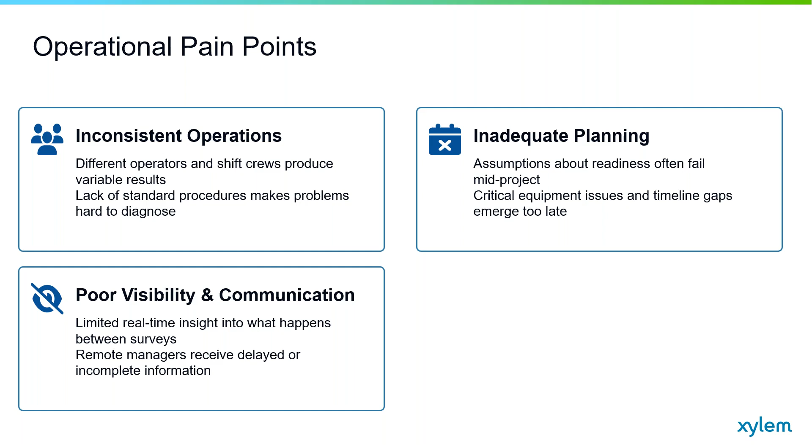Sometimes critical events between surveys go unrecorded. Let's say you have a cutter head that clogs twice during the day. If that information is not logged properly, it's not possible to know that the whole operation is getting less progress than expected.

So the data is also not always used to help new operators. When the data is not recorded, it cannot be used for training operators or understanding good practices or the good approach, so the opportunities for improvement are missed. An operational issue is not analyzed properly, so it cannot be used as a learning lesson.

In certain cases, the knowledge stays siloed. Probably there is a good operator, but he's the only one that understands how the maneuver can be executed, and that information is not transferred properly. In the same way, companies have issues having their retrospectives, trying to understand what was executed properly and what needs to be adjusted.

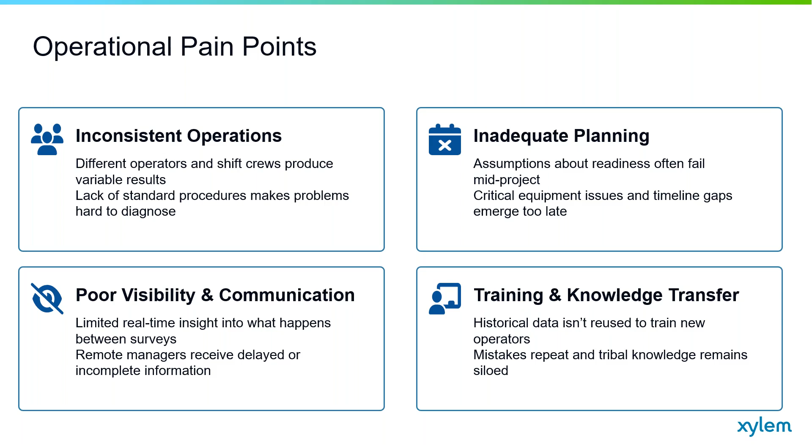On the other hand, we have the data management pain points. It is hard to have a centralized point for receiving information. In several cases, underperformance is often discovered too late. A dredge may remove far less material than planned, but management only finds out weeks later when the reports are finalized. Understanding the workloads and how the equipment is used is something that sometimes is not collected properly.

So in a sense, the issues aren't caught in time. Just for example, if you have a booster pump that is not working properly, that information can go unnoticed for days or weeks, and that affects the whole operation. So centralizing data is crucial.

As it is right now, the industry has several manual tools. Important records are sometimes lost. For example, a supervisor might log a pump downtime on paper, and if the sheet is misplaced, that downtime never appears in the analysis, leaving gaps in the data.

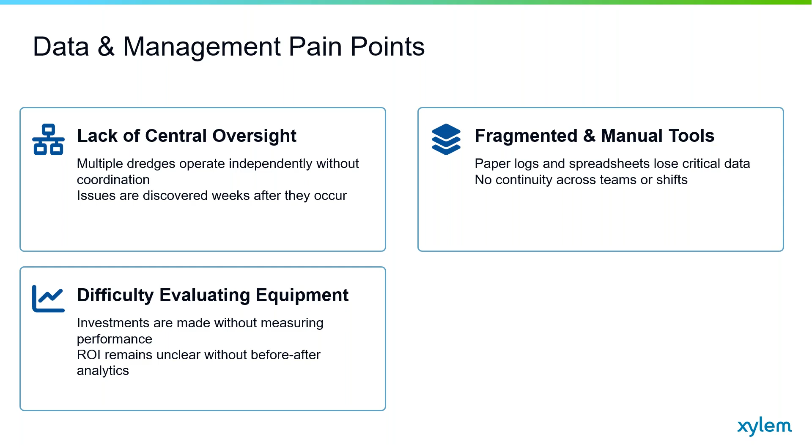In the same way, what companies want is the proper return on investment when these solutions are implemented. And finally, when the whole operation is optimized, that translates into better planning, which again translates into more efficiency in using resources. So these are the main pain points, though there are more.

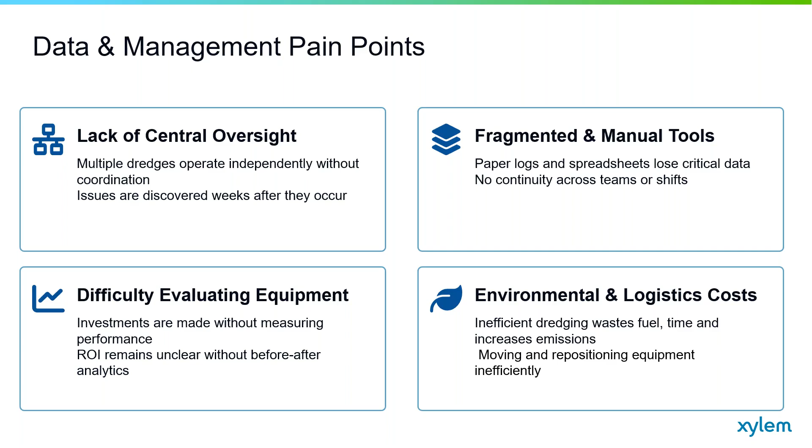We just wanted to bring some of them so you can connect the pain points to the solution we are offering. So I have the demo. I'm going to show some of the tools that we are bringing with DREDGEPACK. Just to start pretty quick, I'm going to jump into the hardware configuration to show only a couple of details that we are going to have in DREDGEPACK.

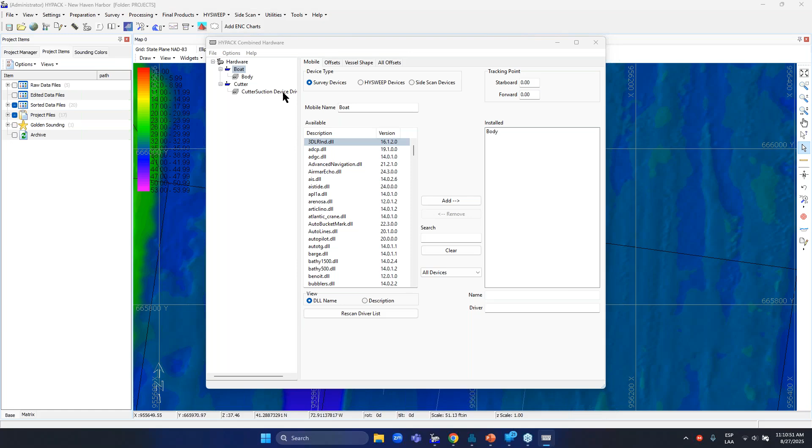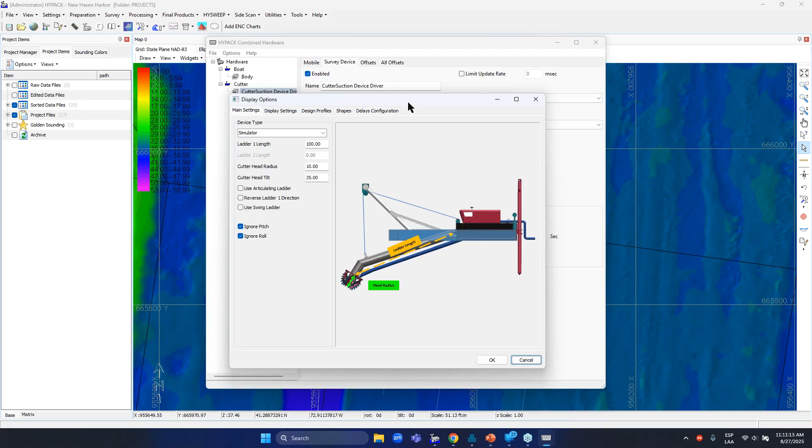The first part is we are improving the whole user experience with all the different drivers, in order to simplify the way you can configure the drivers and also bring in additional tools that can enhance the calibration. In this case, we are very focused on the reports and information that can be generated from the dredge, and that's why I'm going to cover only this tab.

We are including additional tools in the drivers that make it possible to organize a structure of the different downtime or delays that can happen during the operation. This is important because it's something the operator can have available in the driver, and also the on-site engineers can have other tools in order to classify or provide more description of what's happening during the operation.

So if the dredge is not pumping or not operating, classifying or explaining why is crucial. Here you can see only an example. This is something that can be configured at different levels, providing codes and having other possibilities.

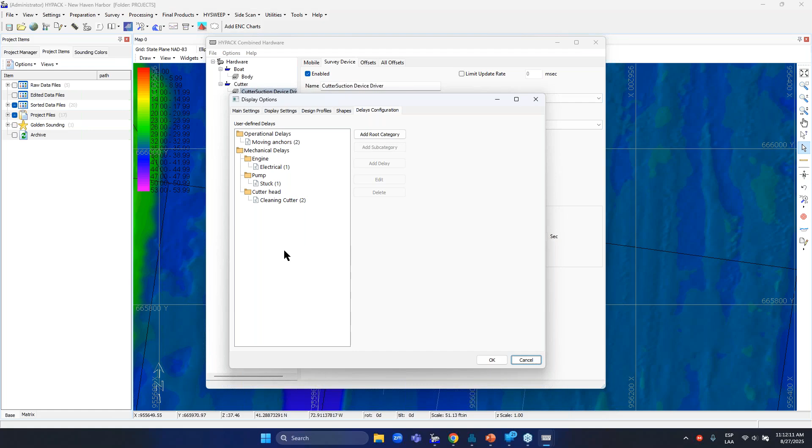So I'm going to jump into DREDGEPACK so we all understand better what the operator will see. Here I have the cutter suction driver where we integrated additional tools, as I mentioned before, for improving the whole user experience, where the information is presented in a different way, bringing multiple options in order to configure different parameters and simplify how this profile view is presented for the operator.

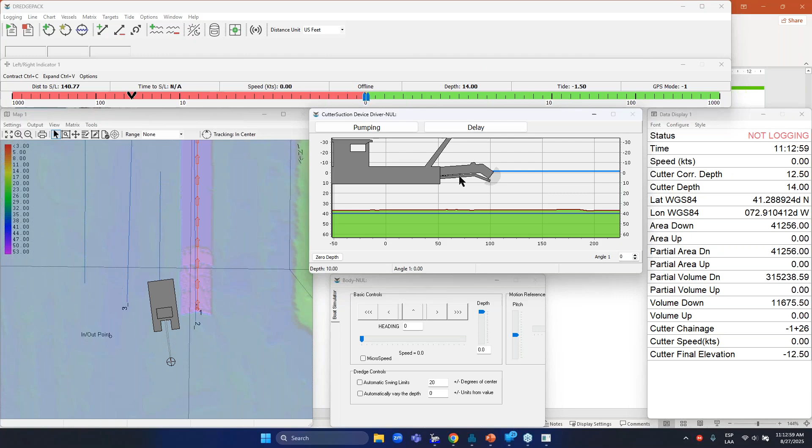And here you see two additional options on the top. So if the dredge is operating properly... let me basically adjust my simulator so we can see a better example. Let me just select a line file here that I used to simulate a new cut.

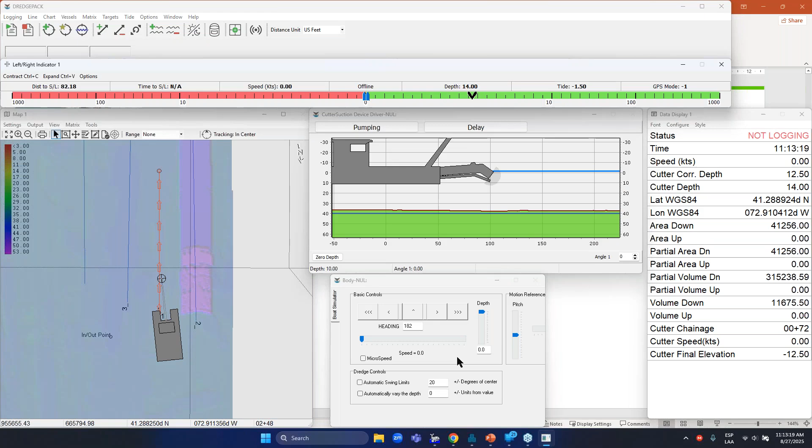So it is presenting a new cut. Let's say my dredge is operating properly. So I lower the ladder and make it swing automatically, and it will remove material. If it's removable material, I can press the pumping option.

So as it is right now, what DREDGEPACK is doing is recording the information and making that information available and organized on a structure that provides a better organization of the data and simplifies the way you generate reports. We are going to cover that in this webinar.

There are additional tools that we are working on right now, and that's pretty much what you see here. This is a program that is collecting information from DREDGEPACK and organizing the whole definition that comes from the sensors - the raw information: position, heading, and all possible variables you can have, for example in a cutter suction dredge: density, vacuum pressure. All of those parameters are recorded and properly organized.

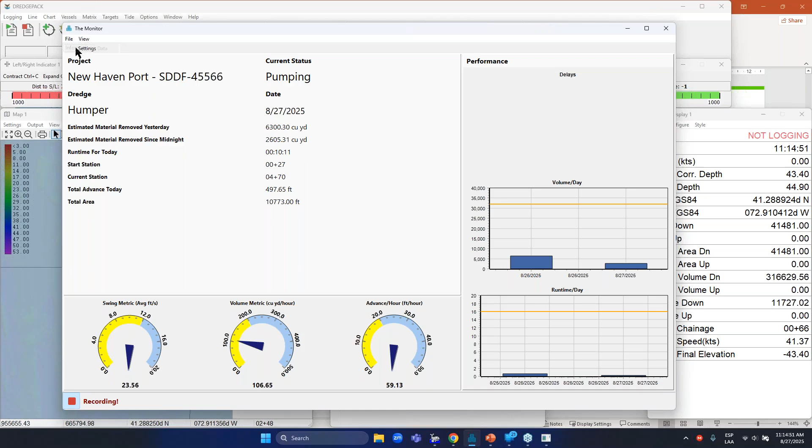This program allows the users to configure and define different parameters in order to save the data in a different way. So I'm going to show you here under settings - I can configure, I can generate a new configuration.

Let's say I am working on a new project, so I can put a new project name, a new project ID, and for example, the expected volume to be removed.

In the same way, I can classify the data, bring in some equipment - that's something I presented before. So let's say I just want to know the performance before we install the booster pump, and after we install the booster pump.

So the data can be classified, and that's the main goal - it's not only storing data, the data needs to have a proper structure in order to be used properly during the reports.

So this program is showing some information. It does some calculations for the operator. The different gauges and parameters can be changed here.

So the calculations could be estimated material removed, or if the dredge has the specific sensors for, let's say, density and a flow meter, it could show the information from those sensors in order to show the production. Here it is showing the runtime, and let me explain a little bit about the downtime and the runtime.

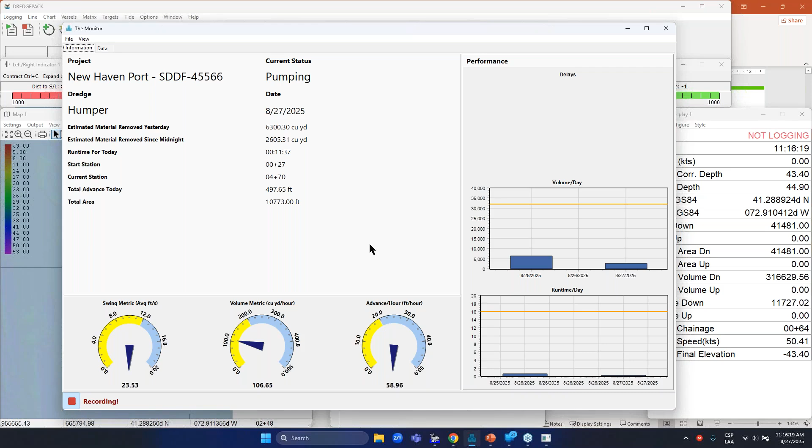So if I go back to DREDGEPACK, I'm going to simulate - we are not dredging. I'm going to raise the ladder, and then I'm going to press delay because we are not dredging. Here we want to classify, and the idea is that it's important to give more explanation of why the dredge is not removing material.

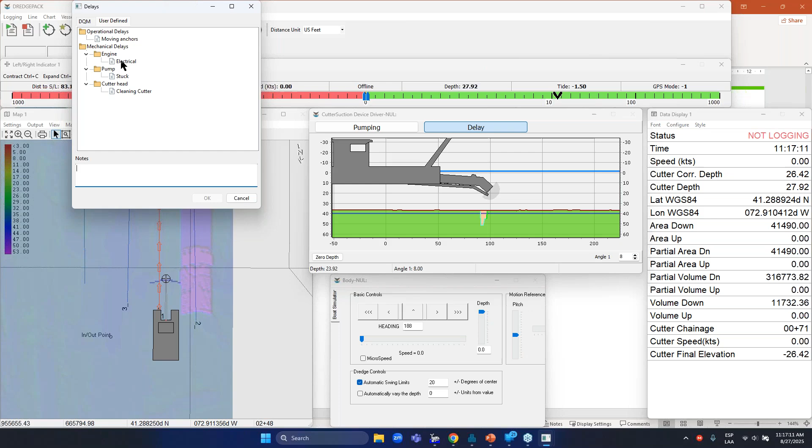We are including two sections here. The users can use the normal standard codes from the DQM, or they can use their own codes under the user-defined tab, where, for example, let's say the dredge is not operating right now because there is an electrical issue.

I can add some notes if I want, but if I press OK here, now the dredge is in delay, and in the program that monitors the operation, it shows the whole operation is delayed. That information goes to the database that saves all of the information, and it will be available for reports. But this dashboard shows the data in real time.

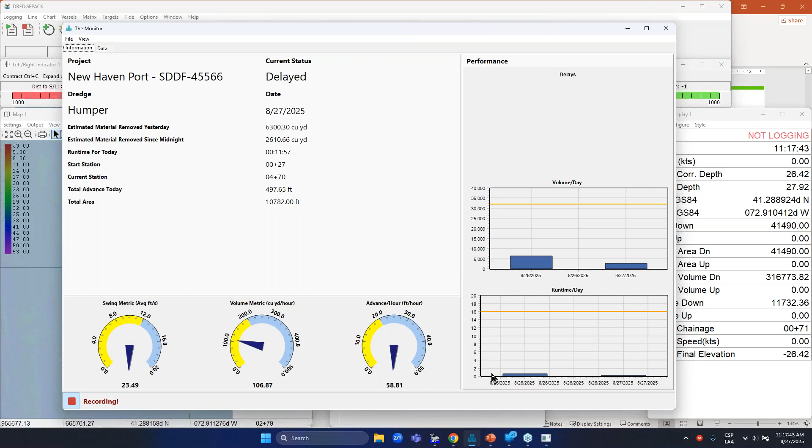Additionally to what we are having here, I'm going to present some other things. But this is pretty much what the operator can see, and there are some additional tools that we are going to be covering.

So let me go back to the slides. Now you should be able to understand a little bit more about the different challenges that are in the different organizations.

We are trying to define the whole solution in HYPACK connected to different levels of maturity in the organization. There are companies at level one, the companies that are reactive - companies that are not really using data to improve the operation. Those companies only have the dredge, probably using DREDGEPACK, or in some cases not using any program like DREDGEPACK.

They go to the field, they remove material. Then there is a level two, where companies are using part of the information, part of the metrics and insights in order to make some decisions, in order to adjust the operation.

Level three is when a company has a very well organized structure for the whole data that comes from the operation, and that information is used all the time to make decisions and adjust the operation.

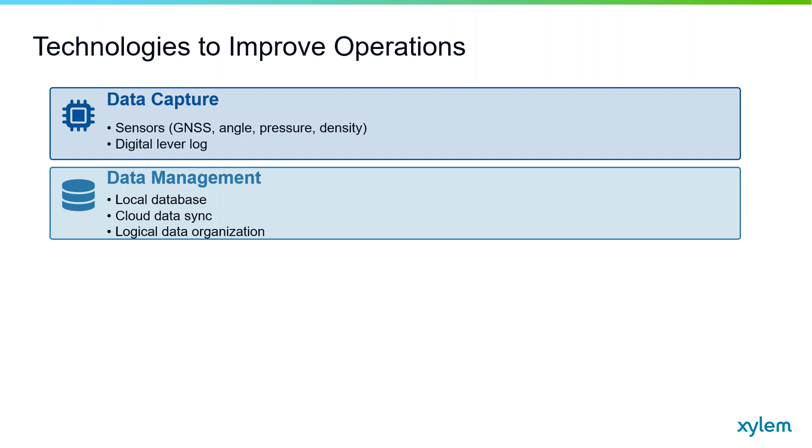So connected to all of these aspects, we have identified different technologies, and we are basically offering different technologies to improve the operations. Starting from data collection or data capture using sensors and interfaces, I already mentioned the digital lever log, where you can provide more description of what's happening during the operation, giving structure to the data, having a database, presenting the information in an organized way.

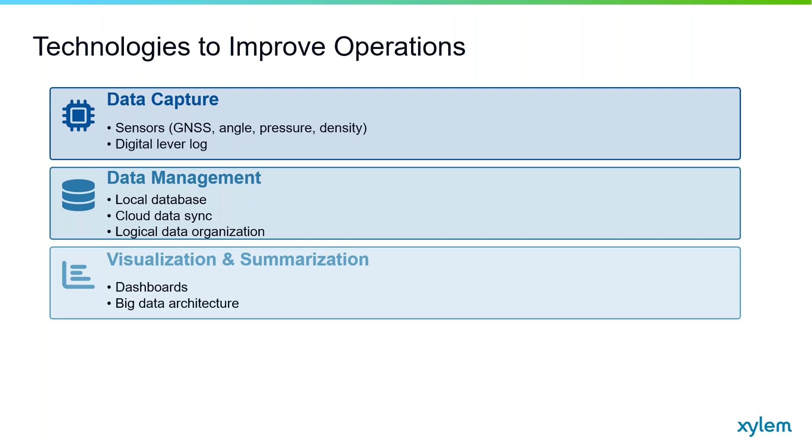That information then goes to visualization and summarization. So instead of seeing the raw value from the sensor, it's possible to see the translated information, translated into insights or metrics. And finally, using the data, it would be possible to generate forecasting and simulations. Of course, having the solutions from machine learning and artificial intelligence is crucial for that.

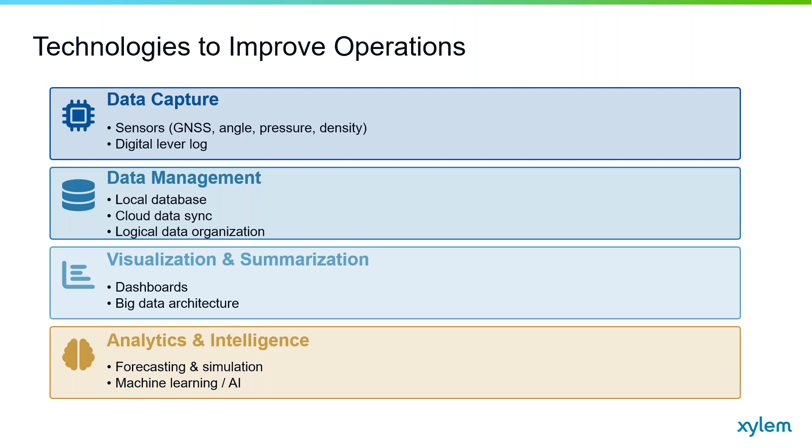So I have this second demo for you. As I mentioned before in the pain point, sometimes seeing what's happening during the operation is hard. So we are incorporating some additional tools that allow DREDGEPACK to not only structure the data, but have the data ready in order to upload that information to the cloud.

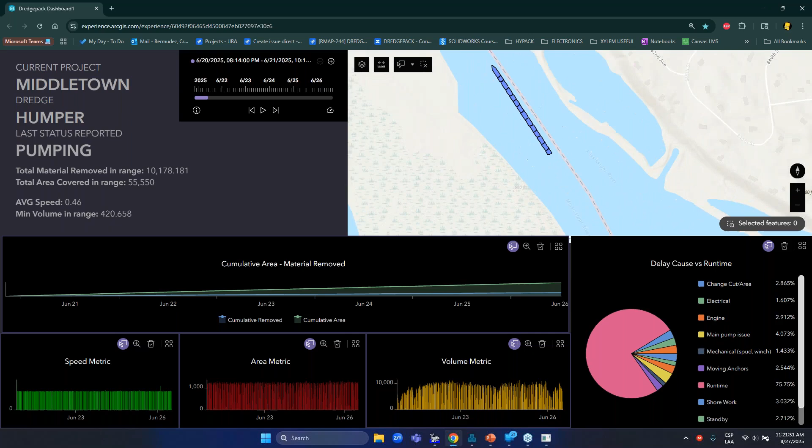And have a solution pretty much what you are seeing here. Let's say you are anywhere in the world and you have a computer or a tablet, so you should be able to see the information from the dredge. In this example, I'm showing some polygons that represent the area covered by the dredge, but I can also see the patterns of the whole swing.

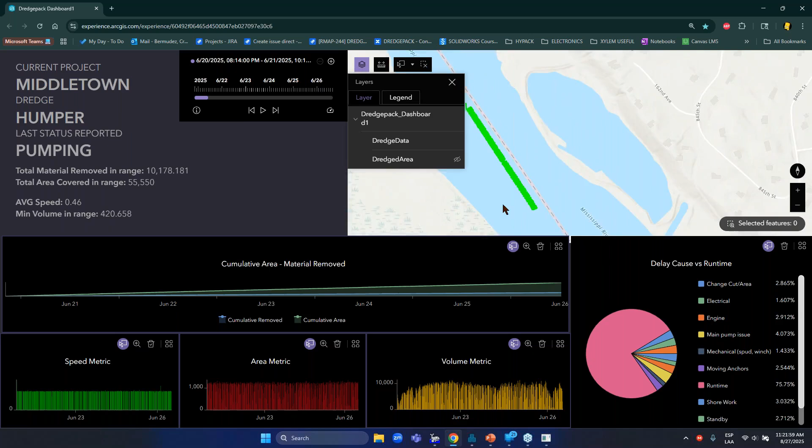So it is possible to see how the dredge is performing, if it's getting enough width of the swing, if it's progressing properly. Everything is time tagged, so it's possible to see other parts of the operation. Additionally, it's important to mention that what we are trying to present here is the intelligence that you can extract from the data.

So you see some metrics associated in order to determine if the swing speed is correct, the area that the dredge is covering during the day, if it's basically compliant to the expectations. It's the same thing for the volume. So the dashboard is pretty much showing that information.

So on the right, as part of the intelligence, it's not only important to know how the dredge is operating, but it's also important to know what is causing a delay. And that's what you see on the right. It's possible to list the different causes of delay, and it's also possible to see if the whole runtime is compliant to the expected performance.

So in this case, it's showing 75%. If that's the performance defined by the company, the company should be able to monitor this properly. So the idea with these solutions is having them available anywhere in the world.

I'm presenting here something from my phone. Let me connect my phone. So if you have a dashboard configured as it is, you can even monitor the operation from your phone and understand what's happening.

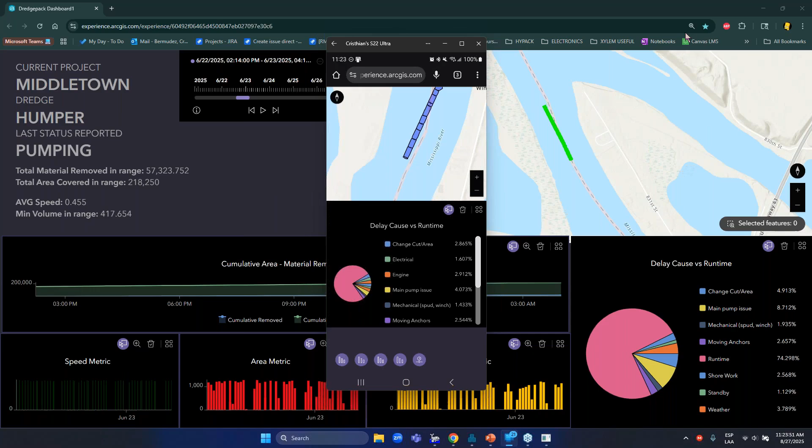Okay, hopefully you can see my screen now. So we kind of wanted to show you guys a real life situation, and we were lucky enough to have a company provide us with some of their information about a project. So we've gotten their surveys, their BD and AD surveys, some background charts, and the data and a database from the monitor program that Cristhian just showed you.

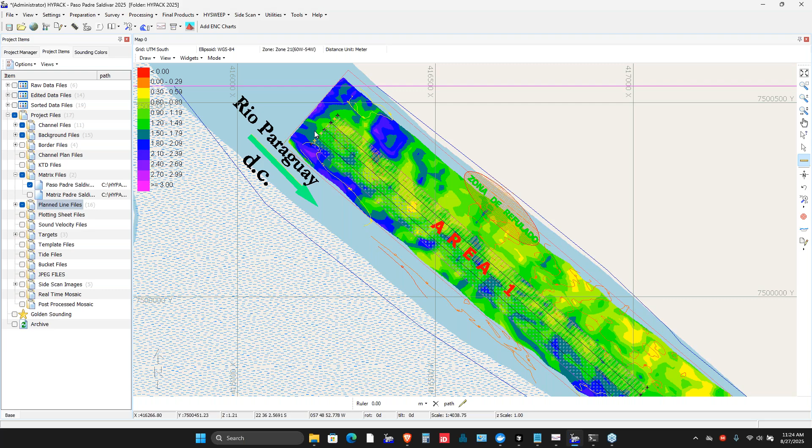So a little bit about this project, just to give you some background on it. This is one of the areas that they will be digging in. Actually, this is an ongoing project, so they are currently still working on this project. So just to show you this little area, it's about, if you look at the bottom of my screen here, it's about...

100 meters wide and about a kilometer long. So it's a simple rectangular shape, and really this is an ideal scenario if you want to really figure out what the best digging conditions are for your project, or for your dredge really.

So you can do a bunch of different things, changing swing widths or ladder elevations, especially due to the fact that there's plenty of material here. There's no real channel coming through the middle that's splitting this cut area in two, so you don't have to worry about swinging too wide and not actually getting any material, because the template or the material is going below the template.

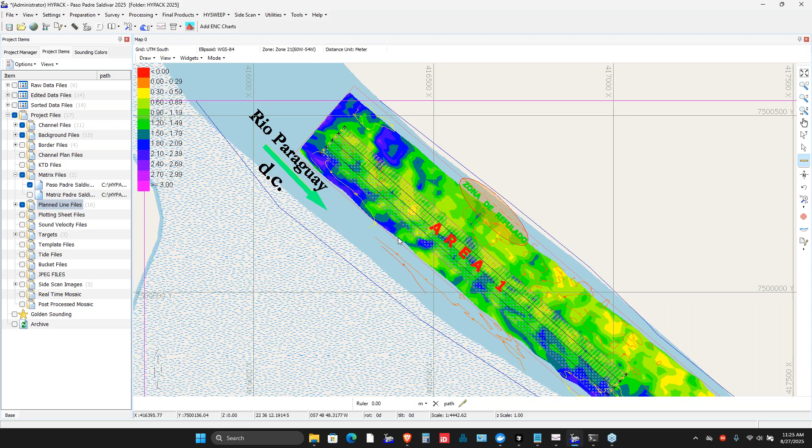So really an ideal situation. What they've done here is separated this area into four 25-meter wide cuts, and they began their work last month, and they're still currently working on it right now.

Again, we're lucky enough to have some of this data, and there are a few different areas that they have. So this is area 1. There are a few different areas downstream, so we're hoping that some of the data we collect can be used to improve some of their operations downstream later down the road.

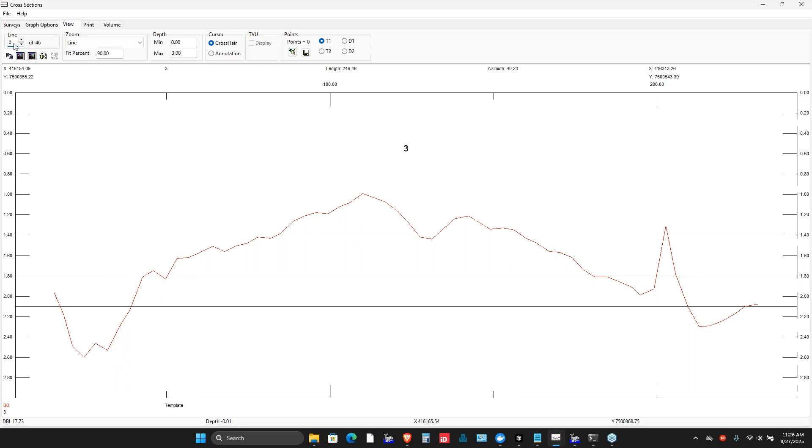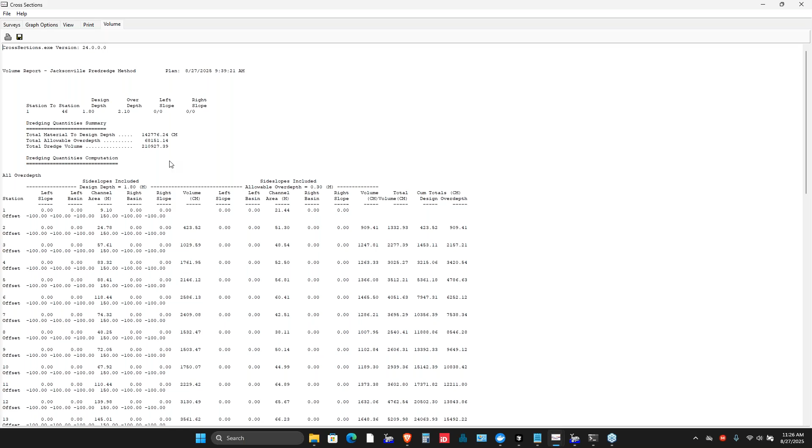So just to show you some of the cross sections here, we've got quite a bit of material. They're digging down to 1.8 meters, their over-depth is down to 2.1 meters. And if I scroll through some of the cross sections, we can see there's quite a bit of material for them to dig through. In total, they have around 210,000 cubic meters to dig through.

So quite a bit. This dredge, I know, is fairly large, so I think it was around 300 feet or so, 100 meters I believe. I don't know the exact specifications of the dredge, but anyways, there's a lot of material here, and they've decided to separate it into 4 cuts.

So we've got their monitored database, and some of the things we can do with that - I'll open up this page here so we can create these production reports. So we've got this production report showing me the downtime and runtime of each day. And if you see here, some of the days actually don't show correctly, because they weren't using the monitor program exactly right, which is something we expected.

They're pretty new to this, and I think it's their first time using DREDGEPACK, so they weren't quite using it correctly at first. But you can see as the days go on, the blue represents the runtime, the gray represents the downtime. Ideally, we want those to equal 24 hours if this is a 24-hour operation. So we can see a few different things in this graph - obviously some of the days they weren't using it quite correctly.

And if we scroll down into the table here, we can actually see how much downtime and work hours, runtime, they had for each day. So again, some of the days don't quite add up to 24 hours, but we're still getting some good information out of it.

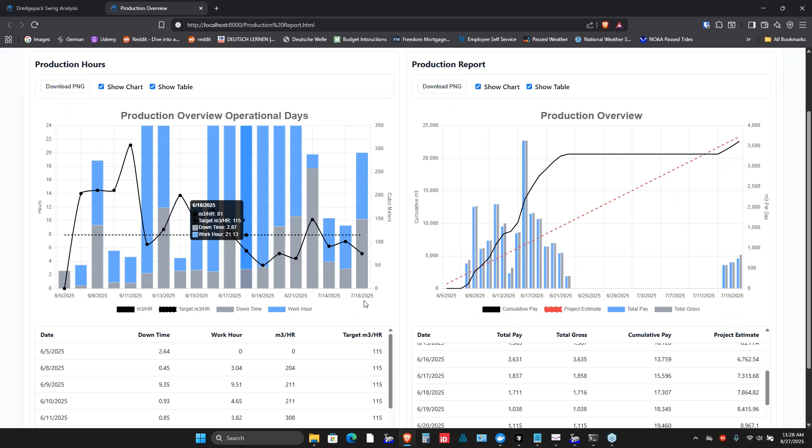On the right-hand side, we've got a similar graph. This is showing us the daily pay cubic meters and the daily gross cubic meters that they're achieving on a daily basis. So we can see that they're doing pretty good some days, and other days not so good, whether it be to runtime diminished for some reasons, and then we also see this large gap in here.

But another important thing to look at is we've got this red line showing us their target cubic meters per day, and that's an accumulated target cubic meters per day. This black line here is what they actually accumulated. So every day their cubic meters is increasing that they've removed. At first they're really doing well, and then again we have this long period of downtime or repair days that they saw.

So it's about a month of downtime, and I'm not exactly sure why they were down during this time. But if they knew about some repair that might need to happen before the project, maybe they should have made this repair before the project. That way their estimate, or they, don't start having their accumulated cubic meters go under this red line here. So just a cool little graph that we can show.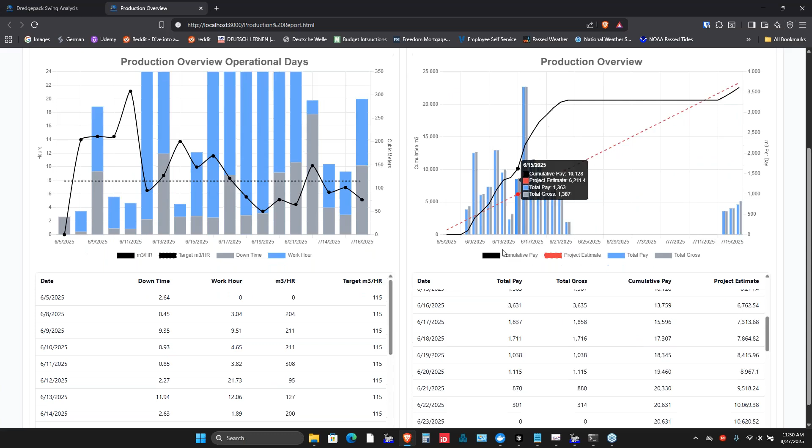And we can also see down here, we also see the total pay in more of a table format that shows us how we're doing here, and each day we can see the accumulated pay as well compared to their project estimate.

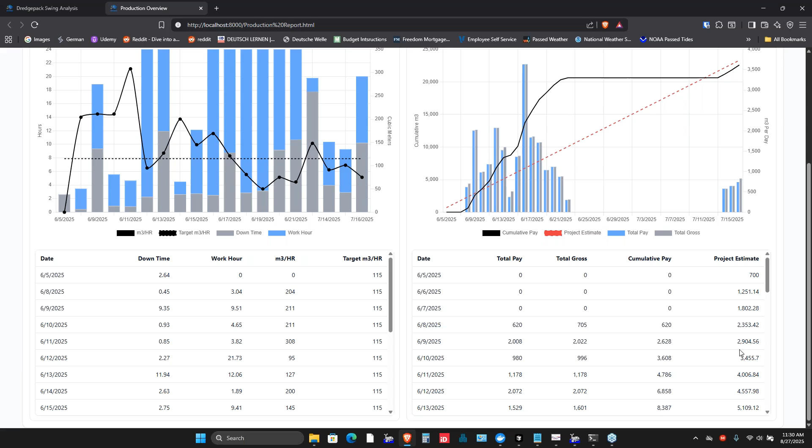So these are the kind of things that we can get from the database if you're using it correctly. There's more things that we can show for sure, but this is kind of a main ticker in a report that I would like to see.

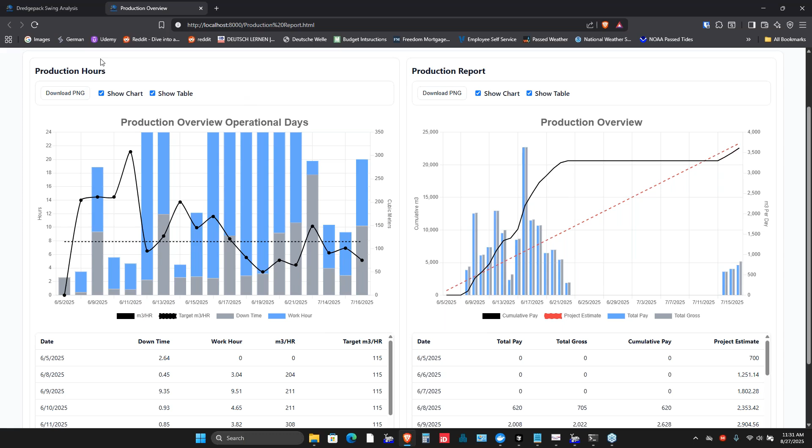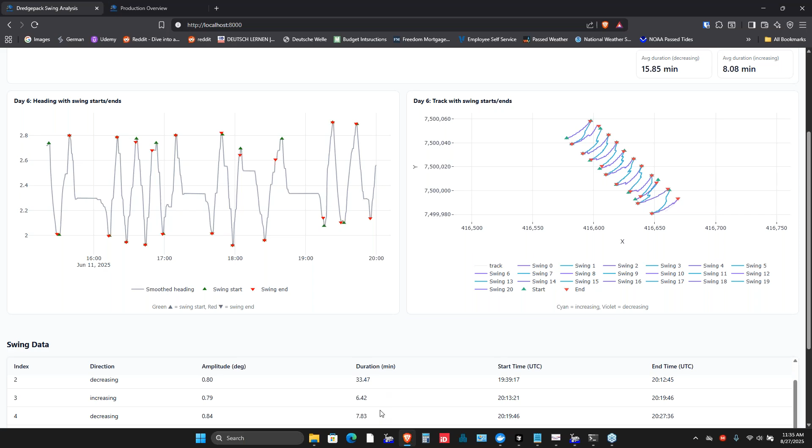Another interesting thing to see here is that the first swing took 6.97 minutes, and the second swing took about 2 minutes longer. So one swing is taking a little bit longer, and we can kind of see that throughout the swings here, which might be interesting just to take a look at.

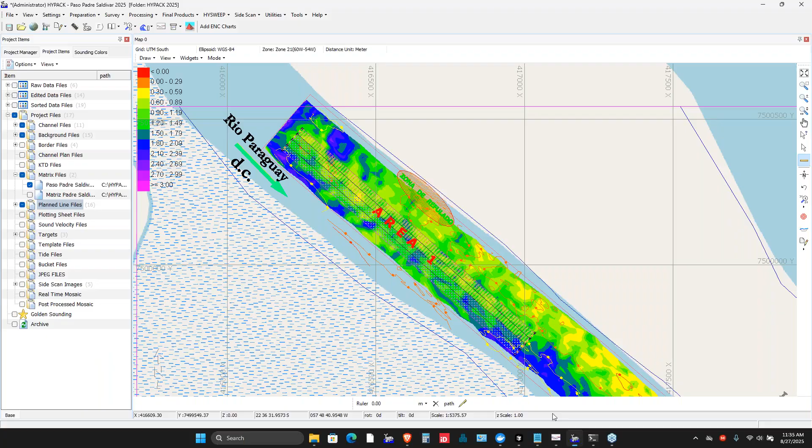One thing we thought about during looking at this data set here was, what if, since this is a rather large dredge, instead of swinging or making your cuts 25 meters, we make our cuts 33 meters, which in a 100-foot wide, or 100-meter wide cut, would decrease the amount of cuts. So if my dredge can handle 33-meter cuts, what would it look like versus a 25-meter wide cut? So we did some comparisons, or a little simulation.

Doing that, what we came up with was just using swing speed. So if the swing speed stays the same at both cut widths, the cycle time for a 25-meter cut, meaning how long it takes to swing one direction then how long it takes to swing the other direction, was 7.5 minutes. The cycle time for a 33-meter wide cut was 9.9 minutes. And then we've got our estimated advance per hour, our daily advance at 25 meters and our daily advance at 33 meters.

So obviously we're making less advance per day, but our cut's a little bit wider. So we should be covering around the same amount of area, or maybe even more if we're operating very well.

So we've also got our days per cut at 25 meters. Again, this is about a 1 kilometer length cut. So we're saying it might take 4 days to complete this cut.

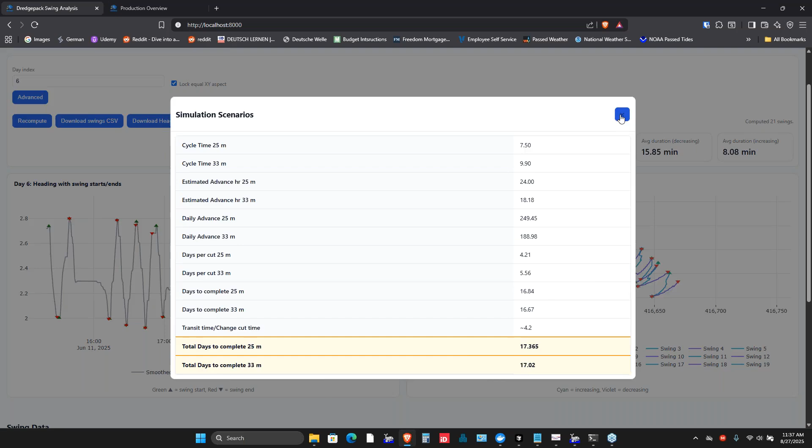So these are the kind of things that we are really trying to organize and give you guys an opportunity to look at in a more structured way. I spent a lot of time taking handwritten lever logs and putting them into Excel and making reports that way. But the more times you're passing handwritten logs and data back and forth into different programs, that introduces some areas for data loss.

So using the tools that we are trying to incorporate into HYPACK, we're hoping that we can make better reports for our customers to then run their projects, make better decisions, and ultimately make more money at the end of the day.

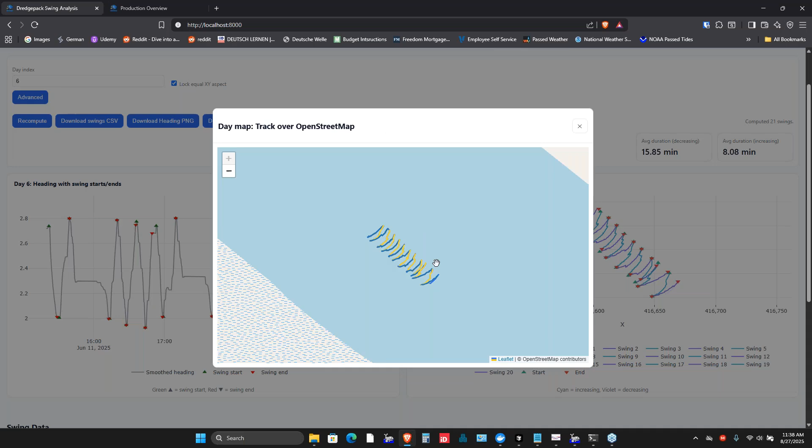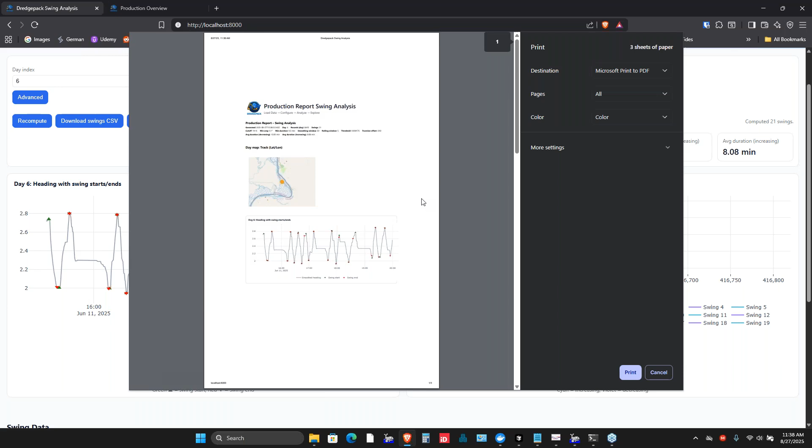So we can also show the map here if we wanted to show where they were this particular day. We can print these as a PDF if we wanted to show our managers, send them out as an email, what have you.

We can also change the days we want to look at. So if I wanted to look at day 7, we could change and recompute the date here.

So we can see, again, we've got our swings here. The duration this day, or our average duration, was a little bit better, but still 8, 7 minutes, 5 minutes. To me, that's still pretty slow.

So they were definitely seeing some issues with hard packed material.

So anyways, that's kind of some of the things that we're trying to do and help customers make these reports and make better decisions. So with that, I think I'll hand it back to Cristhian.

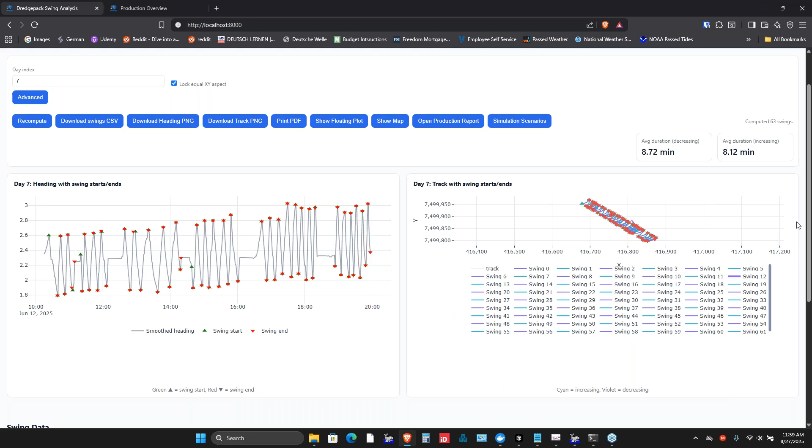And I will stop showing my screen here. And there you go.

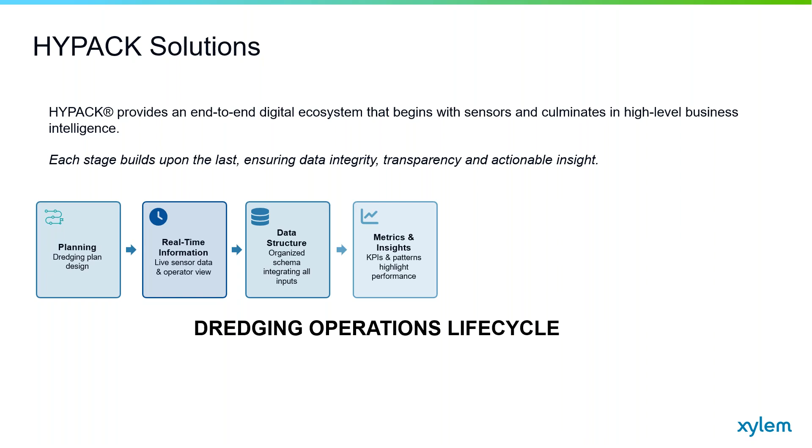That information is stored and organized in a proper structure, so it is available to generate or see the data in order to obtain some metrics, insights, understand patterns, understand the performance, defining KPIs. So when the information is showing that part, it is possible to generate reports, as Thelen presented, for summaries.

So the information is classified in different ways. The operator, the on-site engineers, they see the information probably with high detail, understanding what's really happening with the swing. But for the managers, it's important to see the high level report. So that's something that we are also incorporating.

All of this, the idea is to have what I presented before, the web monitoring, so you can monitor your asset for proper asset management. So anywhere in the world, you can see what's happening. You can understand if some modifications in the whole operation are required.

And finally, the last part I'm presenting here is how all of these things connected together provide business intelligence in the dredging operation.

So this is where the companies can do the strategic analysis and transform all of those insights, metrics, data, reports into something that modifies the way the operation is executed. And that's why it's important to mention that the final step in the business intelligence box represents a cycle, because once you have information, you can use it to do another planning and start the whole cycle again. So this is the definition we are having right now for our DredgePack, and this is pretty much what you can expect in the future development.